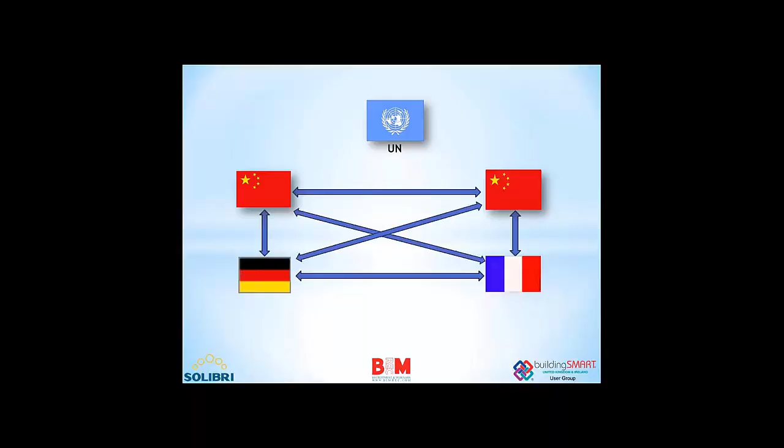I'm sorry if this is a bit scary because it looks as though someone's taking over the world. But here we have a situation where everybody, except one, has to change their language. So now we all speak Chinese. That would work, wouldn't it?

Or would it? Are we actually in a global environment where everybody is going to speak a common language? I think it was tried about 30 to 40 years ago in Europe with a language called Esperanto, and it failed miserably because people are not going to give up their sovereignty.

Now, again, if we try to relate this to technology in the design authoring tool environment, what we're basically saying is forget all of the BIM tools that are out there. And in the UK alone, there's almost 200 tools that have elements of BIM capability.

Forget all of those, just buy one suite, and then you won't have a problem communicating, will you? Of course, that does restrict your choice somewhat. There are many software vendors that would like you to do this, because that would enhance their sale. But again, in practical terms, it's not possible.

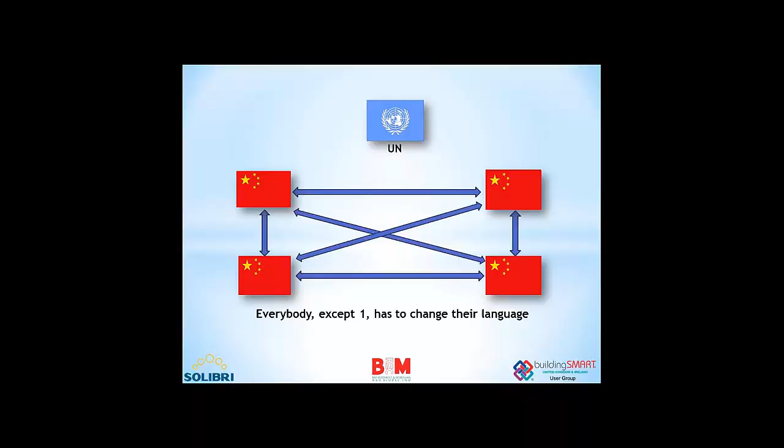This is what is called a single platform or closed BIM. This can only work if one technology provider can provide every element of the solution required within a BIM process. And to my knowledge, not one exists that can even come close to that. So it is a solution, but again, not a practical one.

So let's move to the third option. This is more appealing because now everyone can use their own language and we have a common interpreter. In fact, this is the way the United Nations works. If I'm speaking in English to the UN, my message goes to a bank of translators who relay that back to the rest of the delegates, and the Chinese delegate, for example, will hear in their native language what I'm saying in mine. It's a system that works.

That is a system in technology terms called a common platform, or in the BIM world it's called Open BIM. So can this work? Because this would make life a lot easier for most people. We do have a solution for this, and it's called IFC. You may have heard the phrase, you may have used IFC files. IFC stands for Industry Foundation Classes.

It is a common communication protocol, and in technology terms, if we have separate authoring technologies from different providers, they can work within their own protocol, their own language, their own design process, and then export in this common language called IFC. This means anybody who can receive IFC can import it into their file and the communication is complete.

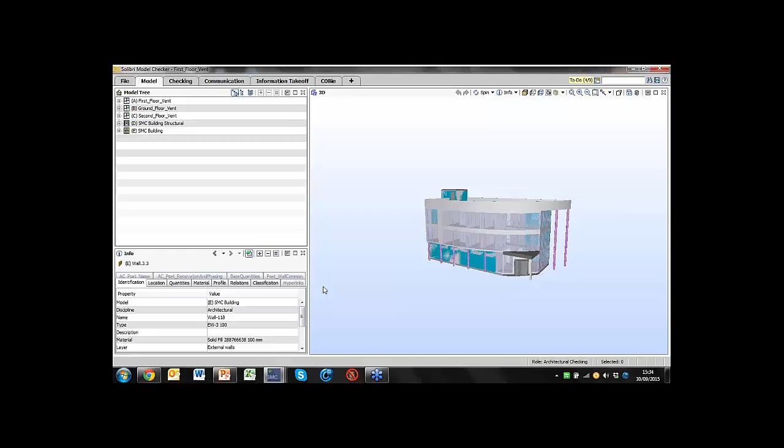I'm not very good at operating software, so if I push the wrong button, I'll apologise in advance. But I'm here to show you what the software does, what this BIM process can do, and what the IFC process does.

So here we've got a model. It's not very exciting, except that this is a building information model made up from a structural, an architectural, and an MEP pack. Each of these are from different authoring tools, but the common factor is that the export of each design has been in an IFC format. So we're collecting IFC files from 3 different design sources which can be brought together.

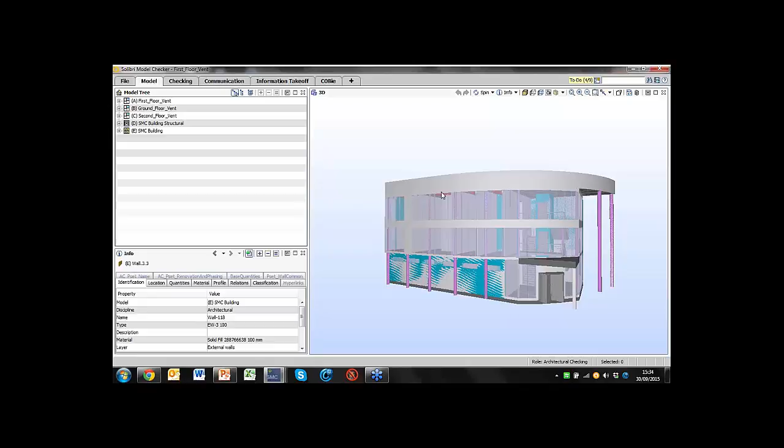So this is a federated model. You can't easily see the distinction between the structural and the architectural, but you can just about see in there the MEP components. So we have a model, and we can walk through it, cut it, paste it, spin it - we can do the sorts of things gaming technology does, but I'm not here to talk about that. The important thing is that this is a building information model.

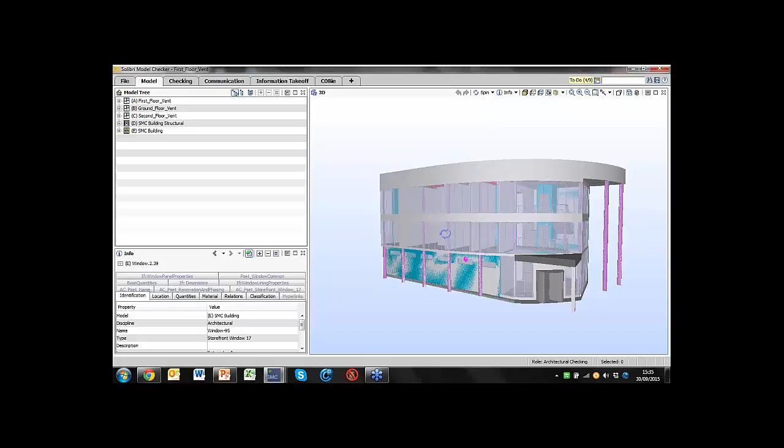As well as being able to see and walk through it, I can click on any component, and down here I can extract its IFC properties. So if you're not familiar with IFC, this is what IFC can give you.

First of all, the identification - what is the model, what is the architect, what is the source, what is the component we're looking at, its type, its materials, its layers. It can give you the location, the precise location, the quantities, details of the material, a profile of those materials. Very importantly, it can give you the relationship of what that material is or what that component is.

For example, if it's an air extract, the requirement of an air extract duct in a secure area or a high contamination area is very different from a public area. So the relationship of where components are within the building is important. It can also give you classification systems. All of this information is inherent in every component in the building information model.

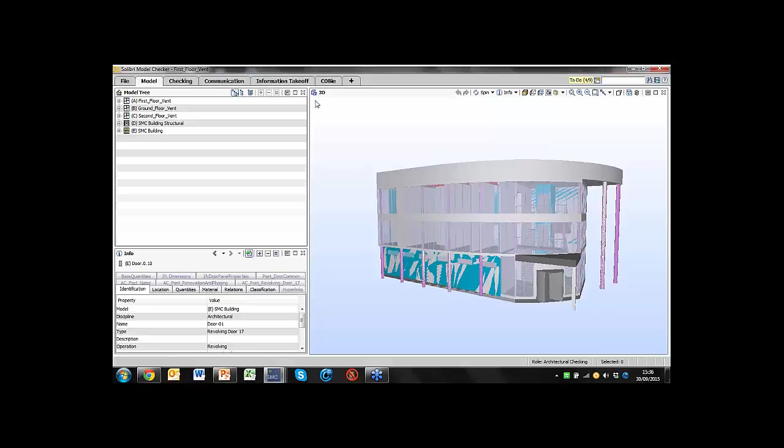Okay, so now we have a federated model that contains a lot of data. How can we use this to quality assure? What I'm going to do is a couple of simple exercises, because with this software there is the ability to create what are called rule sets. A rule set is very simply a collection of questions which have been converted into algorithms - we've taken a question and put it into a technical format that can interrogate a model.

And the questions could be very simple. It could be, I want to know the distance between point A and point B. Or I want to know where components touch. I want to know what happens if that component moves from point A to point B - for example, if I open a door, does it encroach on the public, on another wall, or on a column? So these are simple questions, and we can put them together in such ways that we can ask quality questions of the model.

So I have up here 2 rule sets, collections of questions. The first is called a validation rule set, where we ask questions which are logical in terms of construction - do components touch, what happens if, is that component in the right place relative to that component. All of the questions collectively ask the basic question: is this something we can build? That's one set of rules I'm going to apply here.

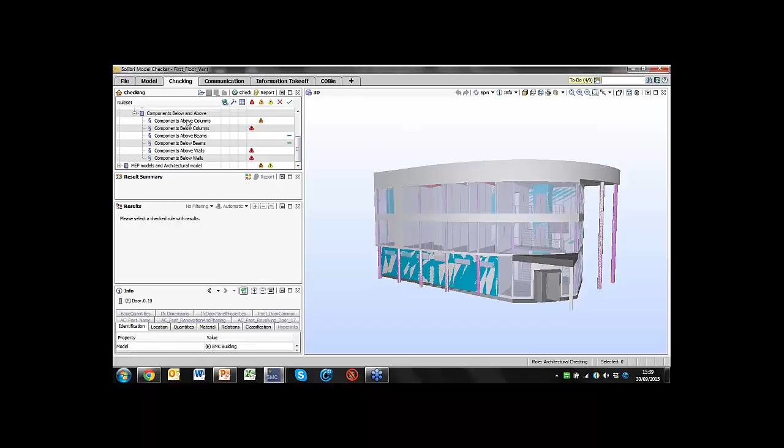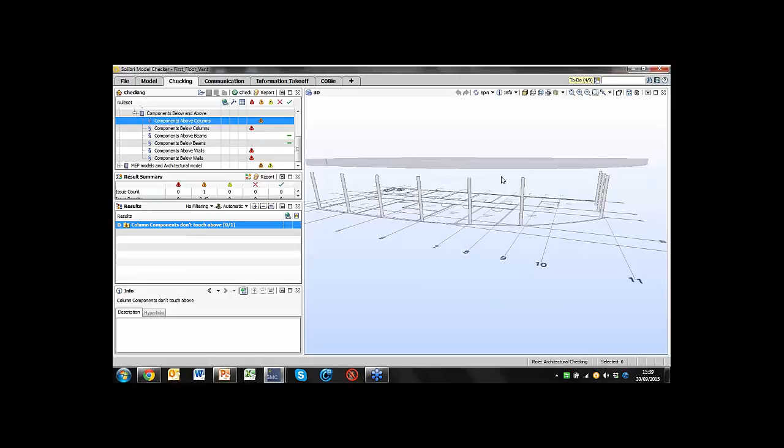So we've got something here which says components above columns. What does that mean? Well, if I click on it and this box opens, if I click on that, it shows immediately what the problem is that it's located. And hopefully you can see that very clearly and very visibly. The columns here don't reach that slab. Now, it may be possible that there's a reason for that. I can't think of one, but it may be possible that this slab is suspended on hooks.

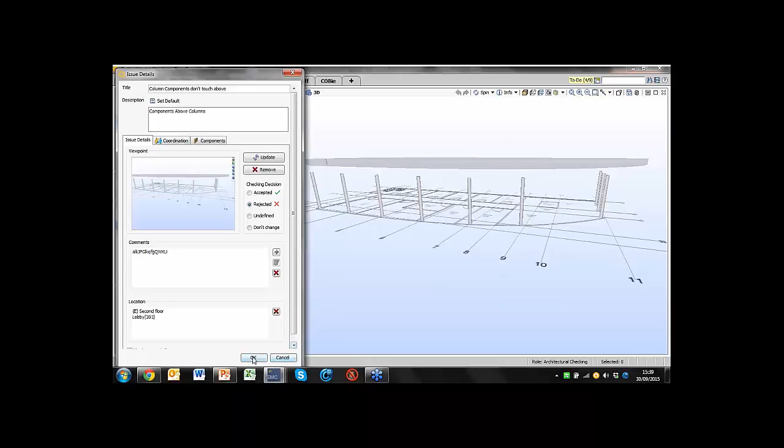All the software is doing is saying from the model, using the process, using the protocols, we've identified a potential problem, which you, the experienced operator, can now say, yes, it is a problem, or no, it isn't. And if I say, yes, it is, then I can create a slide which records the problem. I can describe it. I can put some comments in. I'm just putting gobbledygook here for speed, and I've created a problem. Let me take another one.

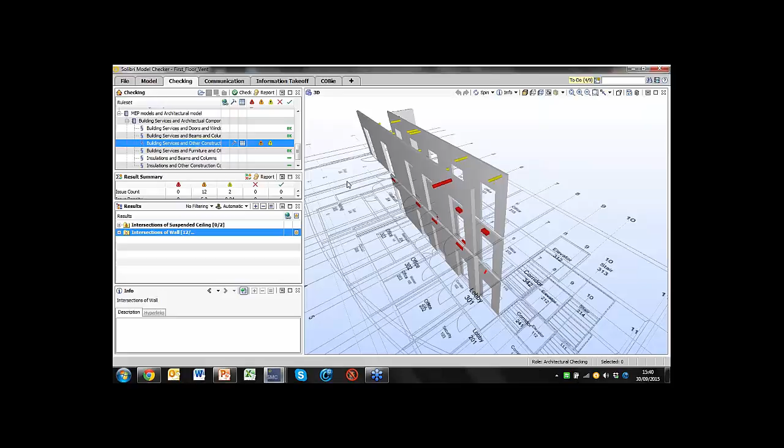So now we've gone to the MEP model and the architectural model collision rule set, exactly the same. By expanding this, I've now reached a situation where, again, you can see instances where components are clashing. And again, I'll just now create that as a particular problem slide and put some comments on. And so the quality assurance in the BIM world now becomes quite easy, because we've got the questions to ask, we have the model, and we simply run through them and identify every particular problem that's being located and say, is it or isn't it a problem?

Having done that, we need now to communicate that back. So from the results I just checked, these are the two problems I found. I can send those through now back to the source so that the source designers can make their particular changes. So we've identified some problems and we've sent them back to source. This is not new workflow. This is the way that these systems currently work. It's just that it's done manually. And in the BIM world, we can do this now automatically with the additional data and the technologies that we have.

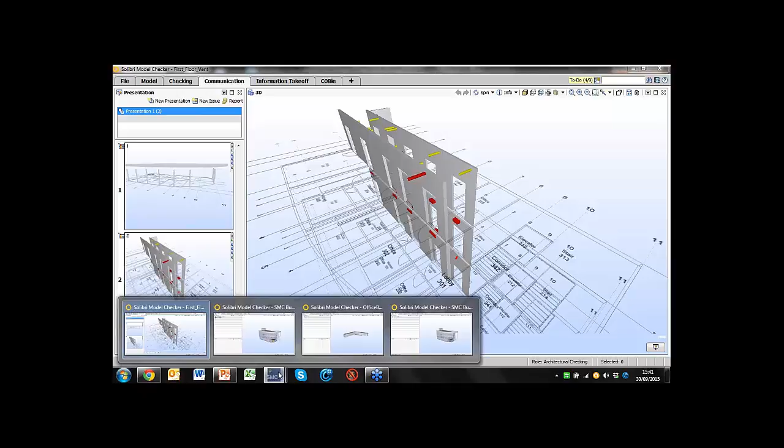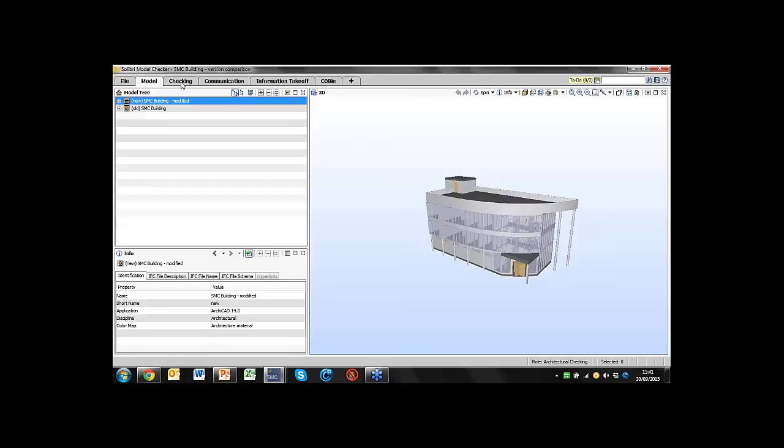So having done that and having sent that information back, the next stage is to make sure it's been done. So I'm now skipping to the next phase of the process. And now we're assuming that all the problems we've identified have been corrected. And so now we can have a situation where the original model, which is called the old model here, is now compared to the new or the corrected model. And in this case, the rule set is basically saying, show me every instance where the components in the spaces have either been added to, removed, or modified. So it's like a 3D light table. I'm superimposing two 3D models.

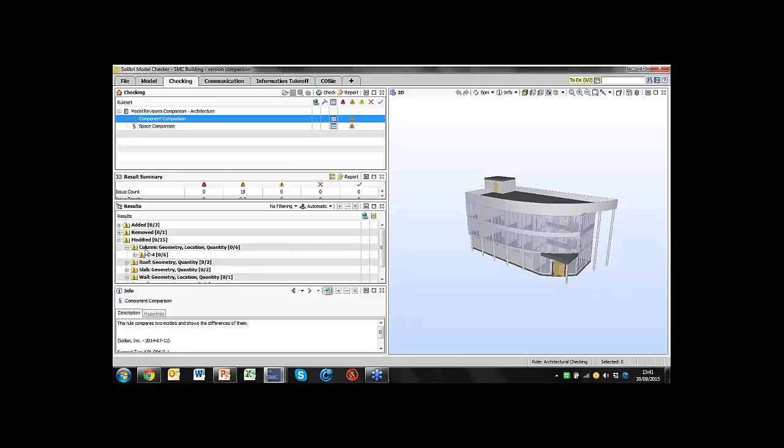So what have we found here, or what can we validate? Well, if I go to the first line here, which is the column geometry, then I can see fairly quickly and easily that those columns that we identified were short have been extended. And of course I've got all the properties down here. So we've got a very quick and easy way of checking that the work we've required or requested has been done. That's the process. It really is simple. If we have the right communication technology and the right process to put together the models, then it doesn't matter how much data we have. In fact, we welcome the data, but we can now validate and check that that data is correct.

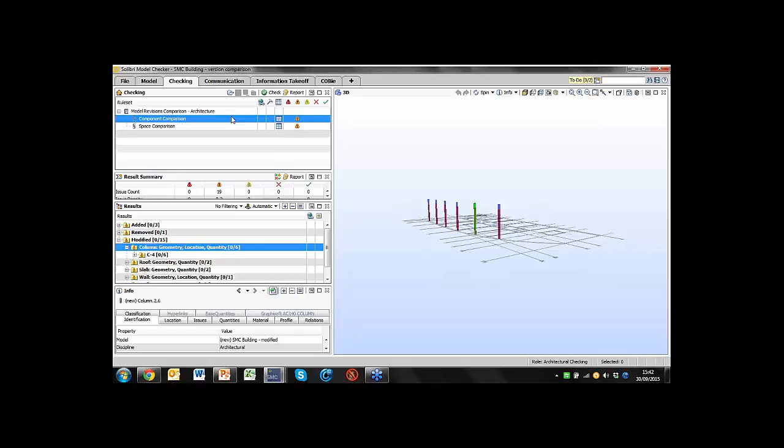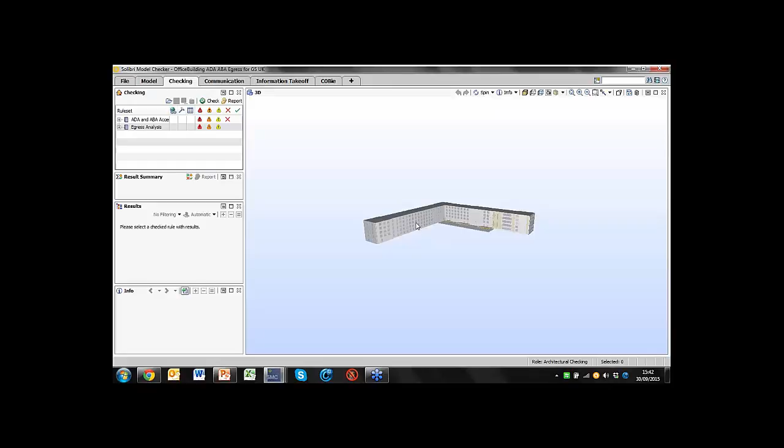How far can we actually go with this? I've just given some very simple examples. Here we've got a situation where we're applying some building regulations. In this case, it's US building regulations, accessibility and egress. I think in the UK we call them Part M and Part B. So we've coded the building regulations, and we've applied those coded rule sets now to a model. And these are some of the things that we found.

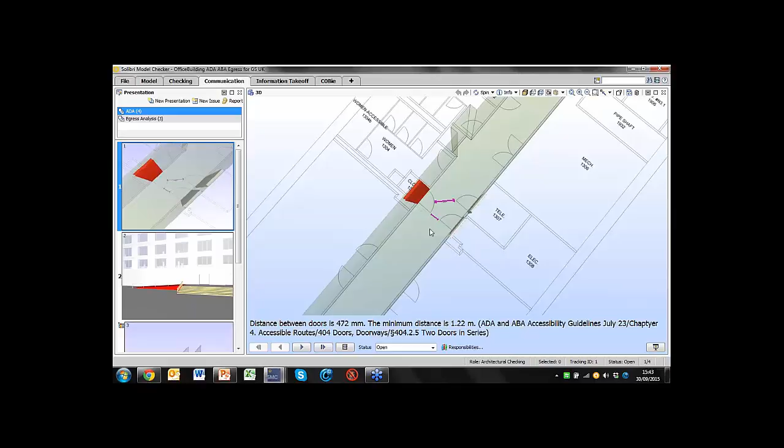So in terms of accessibility, the first one we've identified is that when these doors are opened, you can probably see it visually, the distance between them, it says down here specifically, is 472 mil. It should be 1.22 meters. In other words, that gap is too small. It's a breach of regulation. Now you could easily say, well, that's just bad design. Anybody should be able to identify and correct that before it gets to an advanced stage. Perhaps you're right. Here it's identified a situation where the slope of that ramp for a wheelchair is 1 degree out.

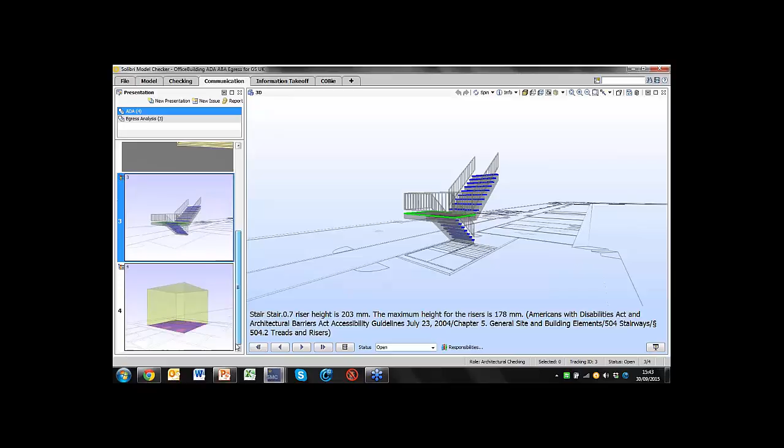Here we've identified that the risers on those stairs are 203 millimeters when they should be 178 millimeters maximum. So we've got potential rework on site. Goodness knows how much the cost of that would be. What is the level of detail that we can go down to? Well, here we've got a situation where the turning circle of a wheelchair in that toilet compartment actually clashes with a sink. So we can use this data-rich environment, if we can control it, to identify potential problems with the design before they move forward into the design environment.

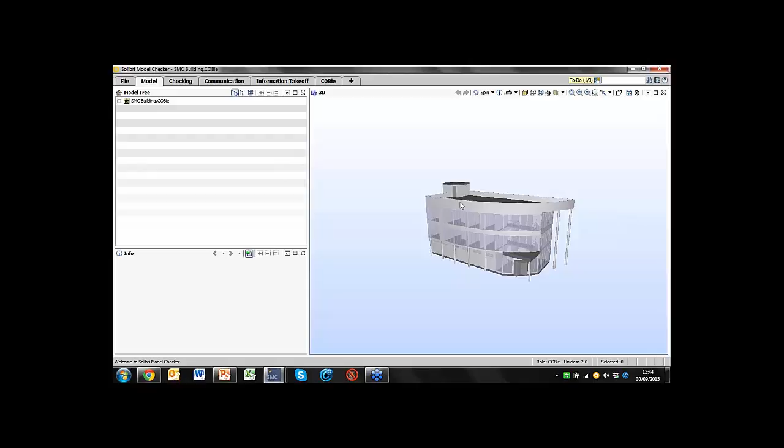We also have the ability to interrogate these in a very advanced way, and the last part of this demonstration we'll look at an area called COBie, which I've touched on before. Here we have the model that we've seen, but this time we're checking it for COBie compliance. So we're asking the sort of questions in here. Does the model contain the information that is required to complete an asset register, or in this case a COBie spreadsheet? So we have rules set specifically for that.

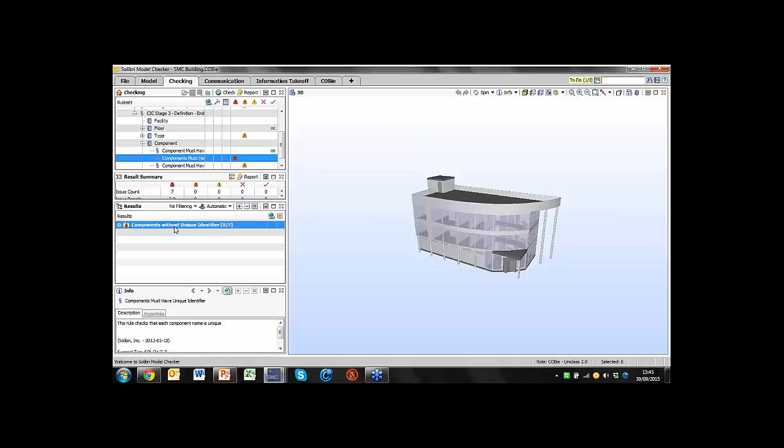So the basic rules are looking at, and in this case I'll take a CIC stage 3, do we have an environment where there's a problem? Let's look at what that problem is. These components do not have a unique identifier. So these are the components in that model that are not identified. Those are the components that cannot be extracted automatically and put into the asset register. So we can have rule sets that look at pretty much any area of quality requirement.

Okay, I don't want to go much further now because I think it's time to try and digest this and get some questions and hopefully try and answer those for you. But basically, what I've tried to show in the presentation and this demonstration is that, firstly, we have to admit the traditional processes that we're working with are flawed. If we don't admit that, then we may as well stick with the drawing board and not move into this BIM world. Most people have realized that we have actually got the BIM world, and the BIM world is now a situation which enables us to create data-rich environments.

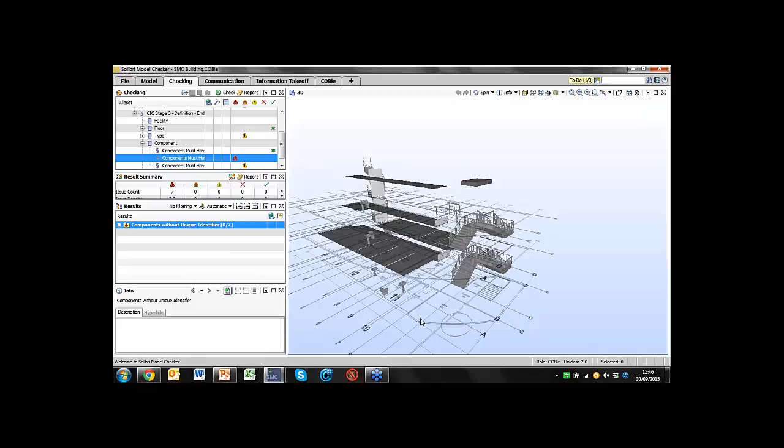That in itself can create a problem, because if we're creating lots of data and we can't utilize that data in the right way, then we're potentially creating more problems, or even worse, we're creating data that we're not going to use, so we're just throwing money down the drain. But if we are going to use this data, we have to find a way to bring it together in such a way that it is useful. If we can do that, then I've shown one of the areas that we can start to now utilize this data, and this particular area that I focused on is the area of quality assurance, and it's only just scratched the surface, but hopefully that has got some of the message across. So Barry, I'll go back to you now, and let's take some questions if we have some.

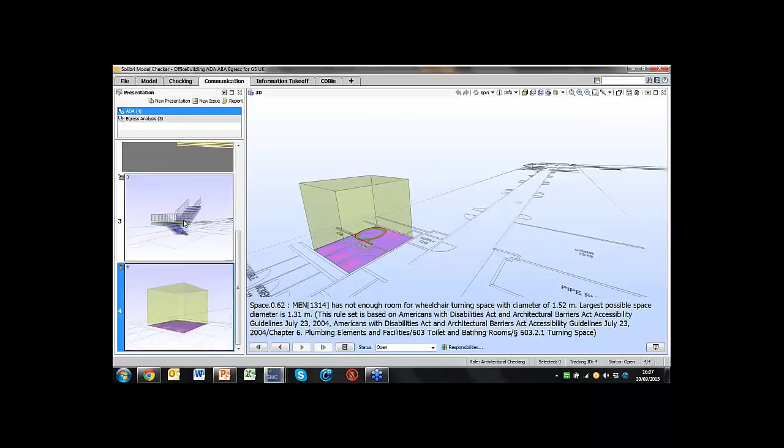So that was the one, I think. So here we've got a situation where it's identified the door. Now, the rule that's been written, and you can see what the rule is down here, because I actually pushed too many buttons. The rule is actually saying, according to the guidelines, the doorways and doors in series, that's what we're breaching, that the minimum distance is 1.22 meters.

So this rule has been written saying between point A and point B, in this case doors, there has to be a minimum of 1.22 meters. So anything that is less than that comes up with an alarm. Sure. Now, you can get into that rule set, and let's say in the UK it's not 1.22 meters, it's 1 meter. Yeah. And all you have to do is to get into the rule and change 1.22 to 1.

So it isn't difficult. What you do need to understand is that you do need a bit of training to understand how to actually access the rules. But once you've got into them, it really is just simply changing a parameter. And anybody who's used to working with authoring software, this is a piece of cake. It's not how you manipulate it, it's how you understand the problem in the first place. Sure. So, you've got to be construction savvy to know what you're doing with the questions. Okay. But very, very easy to modify, but I ain't going to show you, sorry.

My technical director would extract certain parts of my anatomy if I tried that, right.

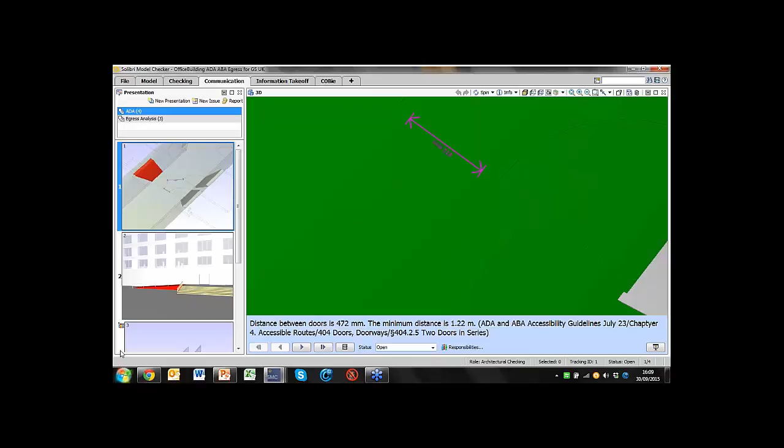Okay. A question's coming from Alex, actually, talking about building regs. What were the building regs used during this demo? Sorry, could you repeat that, Barry? What were the building regulations you were using during this demonstration? Right. In this particular case, these are, I think I'll expand it, the Americans with Disabilities Act and the Architectural Barriers Act accessibility guidelines. So that's our Part M.

Now the reason we've got them for the States is that there's been a big project over there and we've developed the rule sets. In the UK it's not as clear because there's lots of different interpretations, but the basic rules are the same. So we can modify the existing rules. In fact, we're working with a couple of notable names in the industry, and I won't give those names because we're under non-disclosure with them, to develop those rule sets.

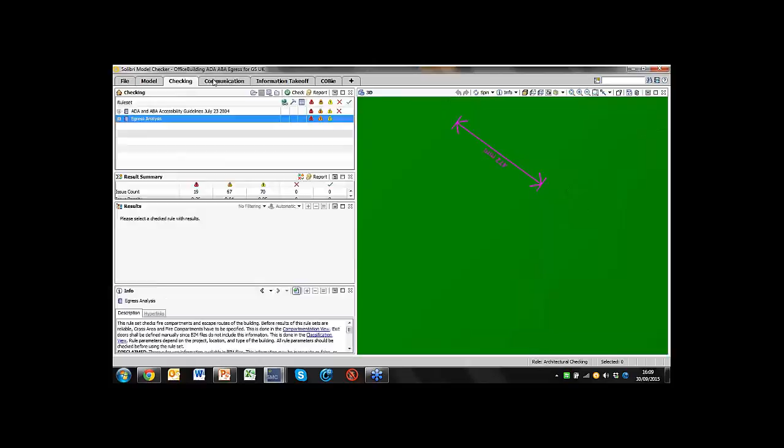Yep. The second one is egress analysis, and if I give you an example of an egress, this one's as good as any, where this is fire regulation. So from that room, it's saying here the access to the nearest fire door, which is there, is 107.04 metres approximately, where it should be 30 metres. So that's fire regs, which I think is Part B in the UK. I'm not an architect, but I know one of these is Part M and Part B.

Sure. In theory, you can do any. If you can think of the question you want to ask, you can write a rule for it. Brilliant. Okay. So another question. So with Solibri, you can integrate models from numerous modelling programs and make it one model. Yes. Yeah. Brilliant. Okay. I thought that's what you were just saying.

Are the rules predefined, or are they imported from some other source, and how much programming is needed to set up the rule? Right. 95% or probably higher of the rules are generic and provided with the software, so you don't have to go out and buy rules. And that will cover pretty much every activity that you've got. Yeah. So things like collision and logical rules of construction, they're generic anyway. It's the same irrespective of where you are.

The only things that will change are things like building regs, because they'll be different from country to country. Sure. Or COBie definitions will be different from country to country. Sure. But the way I would answer the question is that in Solibri we have rule templates, and there's about 60 of those, and a template is one that asks a question. So the template might be distance from point A to point B. Now, if you think about it, there are an infinite number of variations on that template. Sure. So the generic rules have covered all of these, and they provide it.

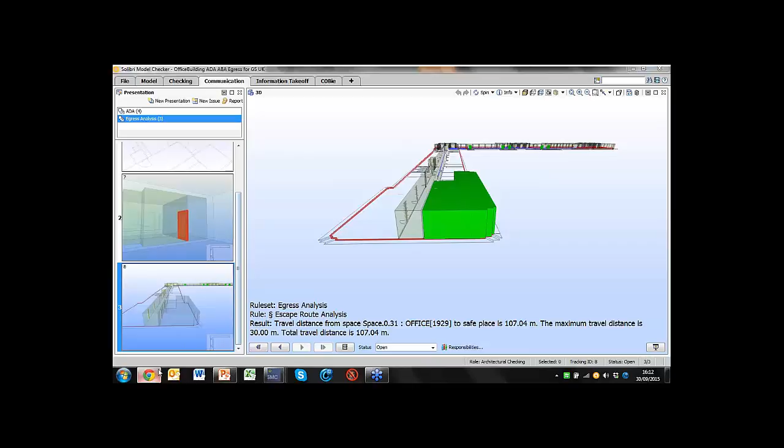Sure, fantastic, thank you. One more question. So I am conscious that it is over the hour mark now.

Do you believe BIM is for the next generation, or do you believe the current generation will adopt? We young folk find it difficult convincing the more experienced folk that there is a more efficient way of doing their job. Well, let me just say, I'm 60 years old this year. So you can teach an old dog new tricks. That's the first thing. I know exactly where the question is coming from.

BIM is here. It's here to stay, and it will be for a number of reasons. First of all, it's the most common sense way of doing things. Secondly, every other industry, bar none, uses integrated process. And thirdly, if we don't do it in the UK, it's already been done in Scandinavia and the Far East. We're not going to have a construction industry. So we've got to do this.

Is it here to stay? Somebody once said to me, when we can't think of another way of doing it, or when it becomes the norm and we can't understand why we did it any other way, then it will have hit. Within 5 years' time, I think we'll be saying that.

So what I will say to the questioner, because they're obviously a damn sight younger than I am, if you can acquire the skills and understand BIM properly, and I'm not just talking about how to model, but what BIM really is, if you can master that, your future is guaranteed. There are some real bright students coming through at the moment, which is fantastic.